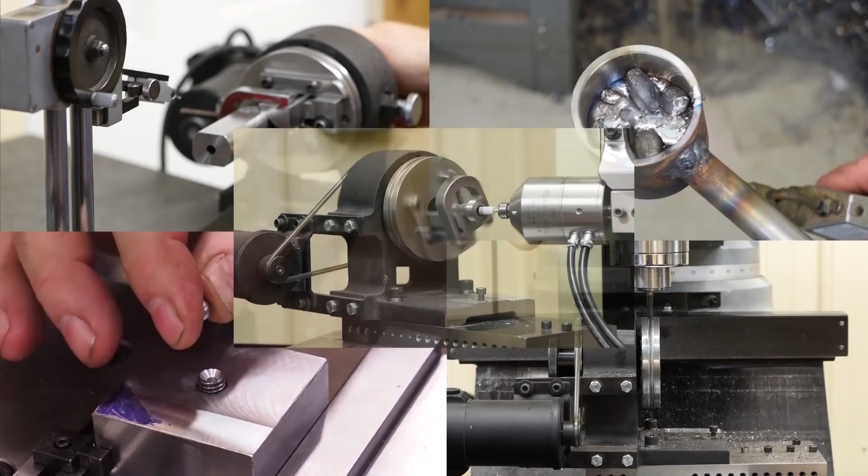About differential screws. My first exposure to this was watching one of Tom Lipton's videos where he went over the mechanics of a differential screw. He'd done an excellent job explaining what they were and how they worked, and I'll put a link in the description box to his video. But this was new to me.

When I wanted to use threads for fine adjustments, I just used a finer thread, like a 32 thread per inch versus a 20 or 16 or an 18, to get some fine adjustments. So when Tom showed how you can play the pitches of screws against each other in what's called a differential screw, I found that quite fascinating, and I thought I'd start playing with them a little to understand them better.

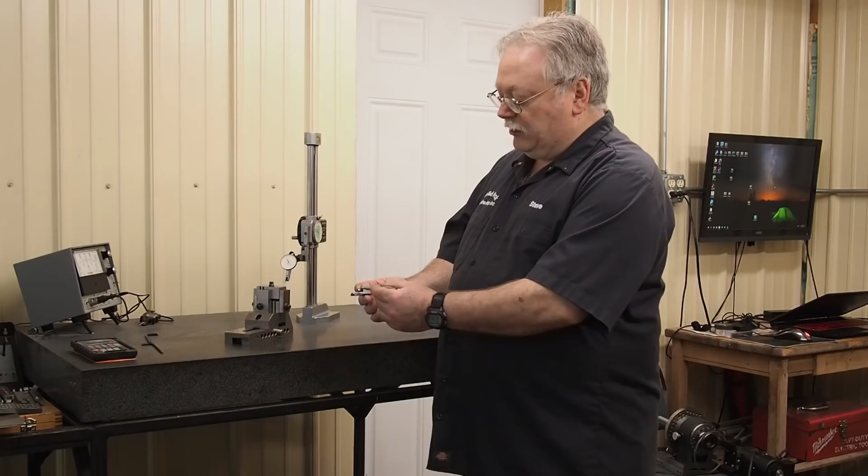In one of our previous videos you saw that I made this little device with a differential screw. You've got a 1/4-28 thread that goes over here, and a 1/4-28 thread in this piece here. This is screwed in, and this coupling device is screwed in and Loctited. Then over here we have a 10-32 thread, which is hooked into this coupler.

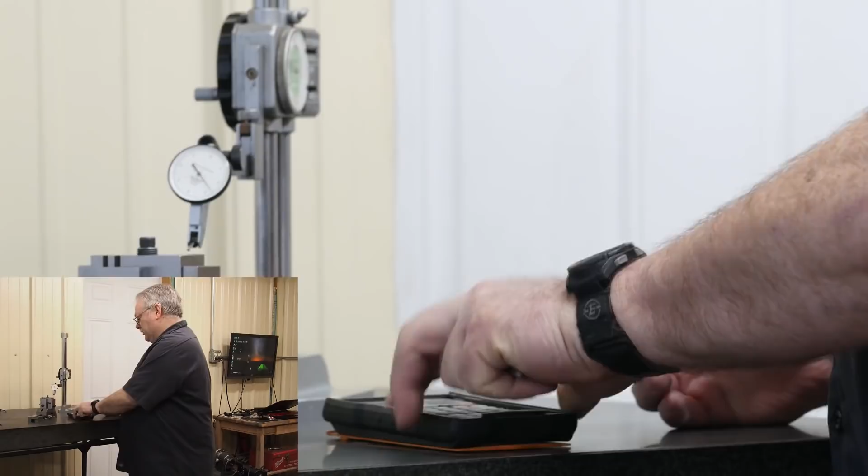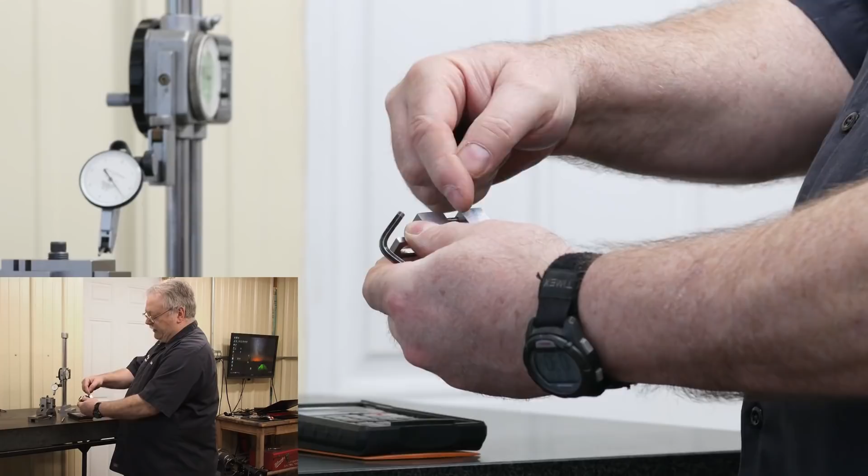I don't remember off the top of my head, but with the 1/4-28 thread, I'll do the math right here. For every full turn of this unit, it's going to want to move this device over here 35 thousandths and 7/10. But because I've got a 10-32 thread here and a 10-32 screw here, the 1/4-28 is pushing it this way, and the 10-32 is pulling it back that way.

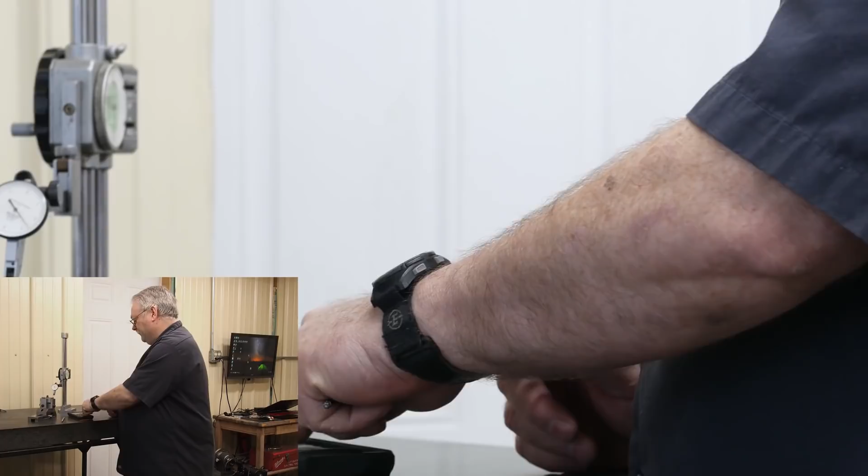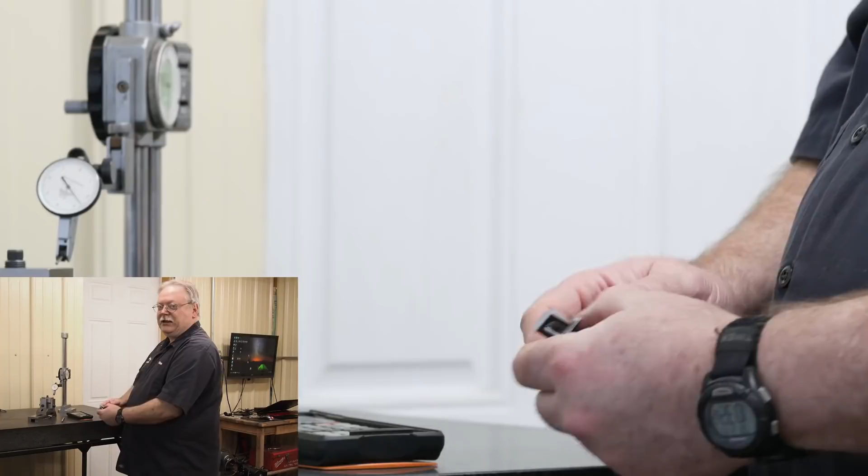What it would do is pull this back 31 thousandths and 2.5, so you'd have a net gain of about, I think, 3.5. Let me check the math. Yeah, so what it works out to is, for every revolution, I'd be moving a certain distance one way and pulling back a certain distance the other way, giving a net gain of 4 thousandths and 4/10. When I hooked up an indicator—I'll put a link to that video here—it actually came out very close to that.

I'll pull this unit apart in a minute so you can see what I built. Basically I have a 1/2-20 thread up here, and down below on this block I have a 1/2-20.16 thread. The way I got that thread down here is I used a CNC lathe and just programmed in the numbers. I don't know how accurate and how many decimal places the CNC lathe would be able to give me for that 20.16, but I thought I'd try it and find out.

So I did the math with the amount of adjustment you'd get out of a 1/2-20 minus, or add in depending on direction, that 1/2-20.16. For every revolution, I was shooting for a 4/10 adjustment. Well, as you can see here, I don't get the 4/10 adjustment—I have about 2.7. There can be a number of factors.

One, the threads are just machined, not ground threads. This pin, the unit with the outside threads—the 20.16 threads and the 1/2-20—I cut those on a piece of steel that was 50-52 Rockwell, so a hard piece of steel. This piece here is soft; I just ran a 1/2-20 tap in here, and I have a little bushing in here that was soft, and I used a different internal thread tool to cut the 20.16.

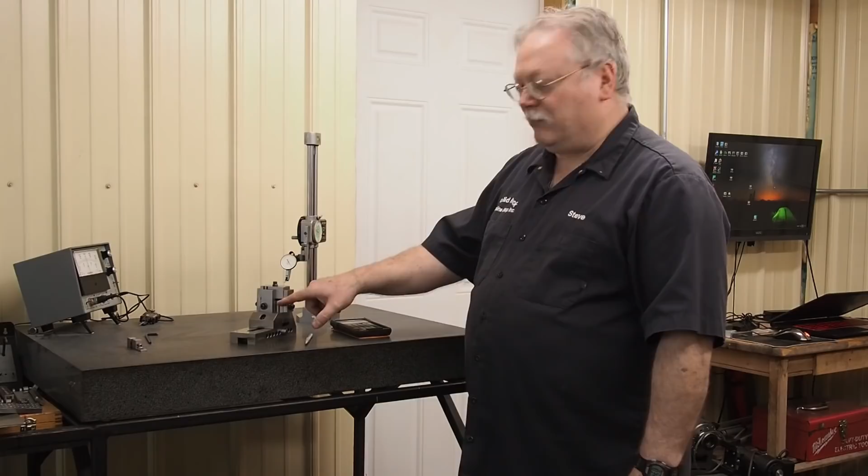There'd be a couple times that I would turn this, and then I might not quite get to 2.7, it might be 2.5 or closer to 3. That could be in the mechanics, since I just made a cheap, dirty fixture. It could be some of the variables in there, or in the threads. There's probably burrs on the edges that look good to the naked eye, but if you look closer you may find some of that.

But anyway, that was a demonstration of a differential screw. I'll show you the reason why I'm looking at a fine adjustment. I think I mentioned in one of the other videos that we want to build a fixture we can put on the surface grinder so that we can grind between centers. I'll show you over here on the computer.

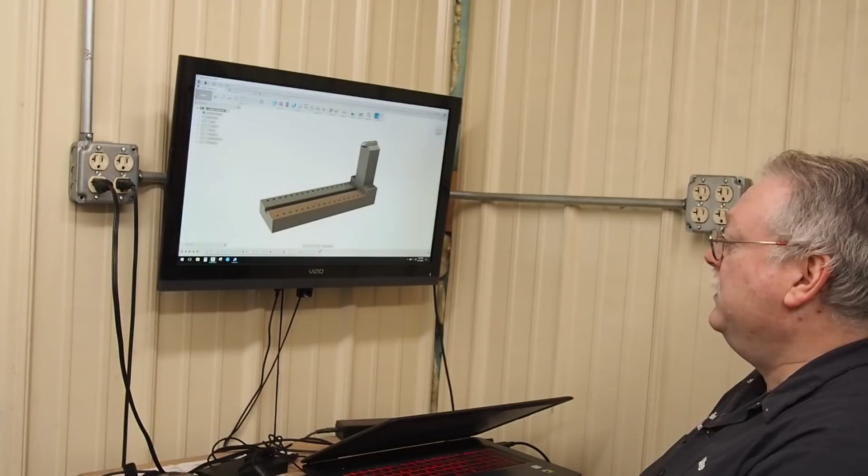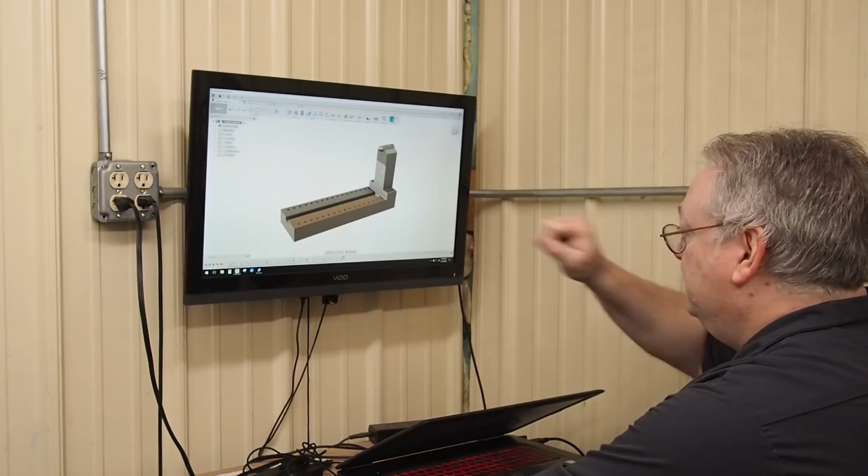Here's part of the design that I got started. This will be the tailstock end, different pieces with a dead center over here. This side will be the motorized end, and then I'll be able to have the adjustment going up and down. But what I wanted to do is have at least a two-part, maybe more, so I can have a fine adjustment, because you need a way to take your taper out, since you're always going to end up with a little bit of taper.

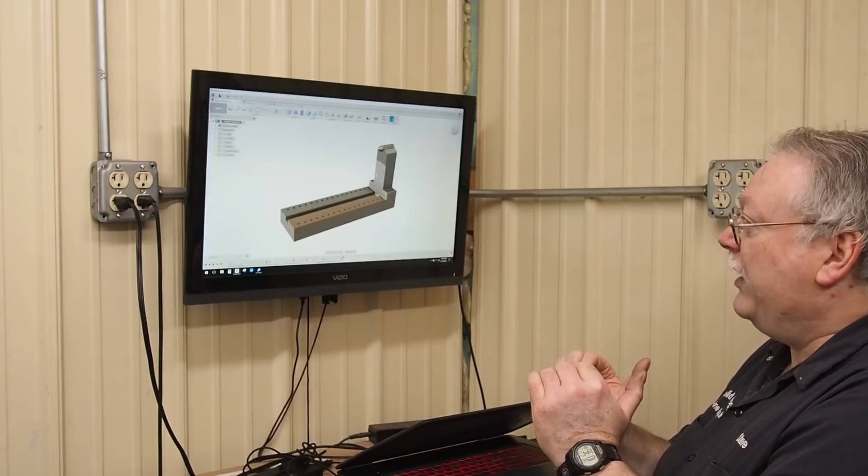When you grind between centers, if you got good centers, you can get some of your best, most accurate grinding. So if I need to take a tenth, say if I got a part that I'm grinding and I have a tenth taper in it, that means I need an adjustment of about 50 millionths or less. I need something with a fine adjustment, because if I got a tenth taper, I need to take half of that from each side. As I raise 50 millionths, that's going to make the tenth difference. So again, I need something with real fine adjustment.

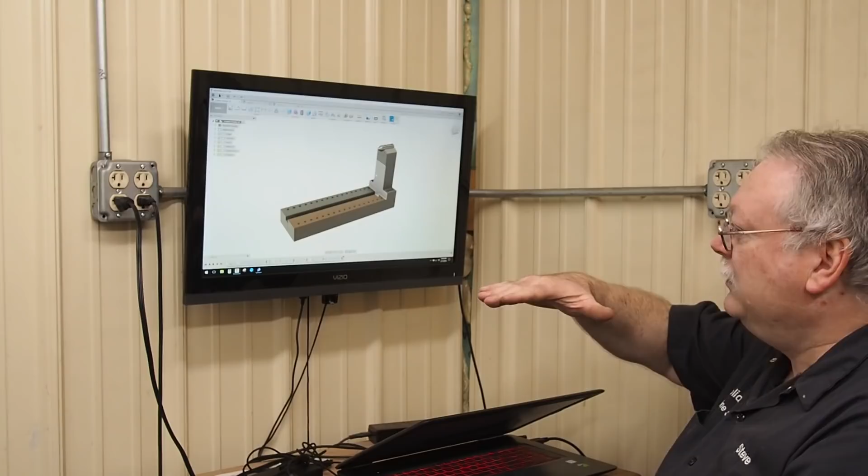Now some of these devices, because they're so fine, they'll just have a flexure point on there, and then they just kind of angle the center. Well, I want my center lines between them to remain true, and just be able to raise up and down. So just some stuff I'm horsing around with, playing with. I've got some different concepts I'm looking at over here.

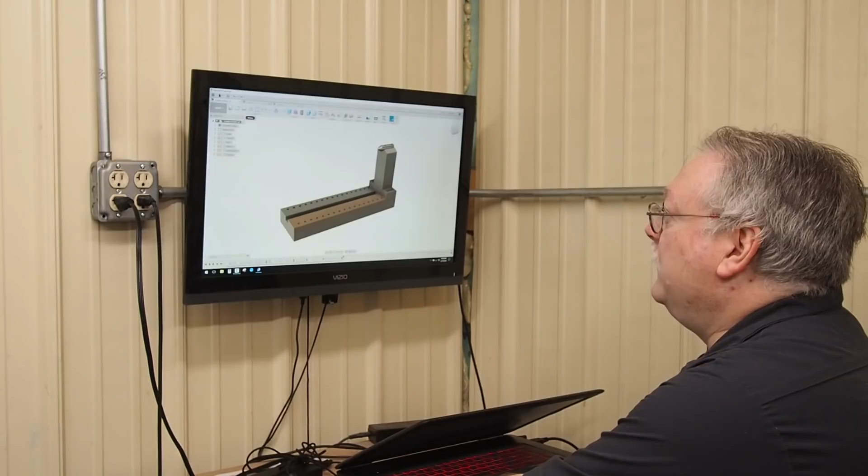One of the things I'm looking at right here, I can have my center mounted over here, but I can make a couple blocks, and this will be kind of a fun little project. I'm only going to have to adjust probably less than 10 thousandths, so getting something that interlocks like that, and machining and grinding that and getting it all matched up is going to be a little bit of a challenge. But I think it'll be a fun little project. Things will interlock, and that's just kind of a rough design and concept that I'm doing now.

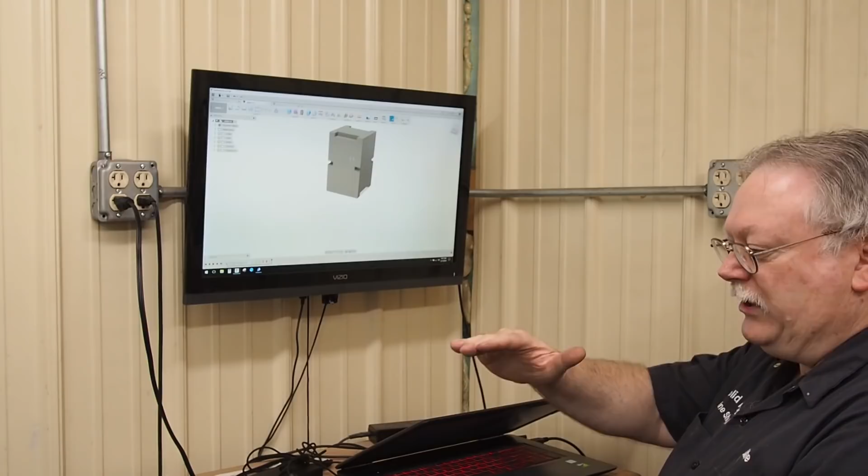Now with the differential screw, that adjusts pretty nice, but the problem is, as you saw in the video at the start, as that screw adjusts, I've got to have quite the length for the screw to adjust, because one thread's pushing, the other's pulling, but yet that screw's moving quite the distance. So I'll be limited to how much I could do, and I was hoping I could just get about 4 thousandths each direction. So another unit that I'm going to play with, and it'll probably be a future video, I think is going to work better, and I'll probably go that way.

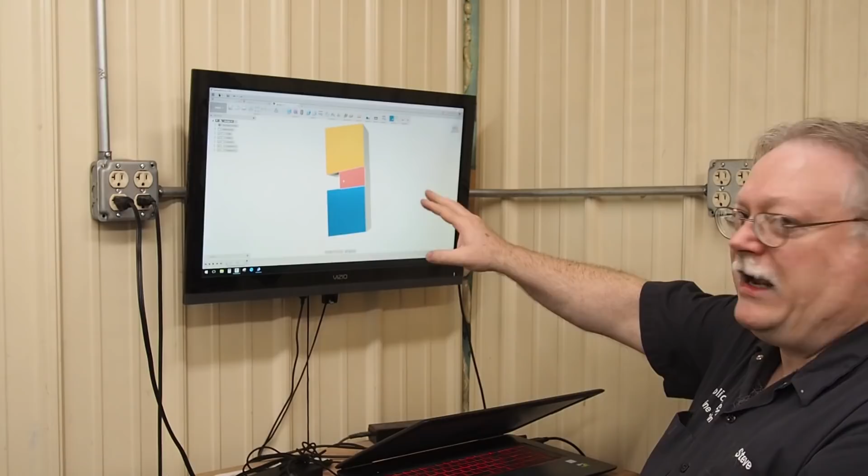I'll have a wedge system. If you do the math, you can take a system like this. I can have a screw sitting on this end pushing at this wedge. I have this one drawn at 4 degrees so you can see it a little bit. Here's your flat surface, and here you've got an angled surface, and an angled surface there. But if I use a quarter-20 thread, every revolution would push this wedge in 50 thousandths. And at about just a little less than half a degree, that would raise this block up about 4 tenths.

The nice thing about this is if I want to add another wedge, say down here, I can have this one add just a hair under a half degree. I can get that extremely fine adjustment. I can have another wedge over here at about 4.5 degrees, and then for every revolution that I go up, I'm going to go up 4 thousandths. So I can have a coarse adjustment with a wedge system down here, a fine adjustment there.

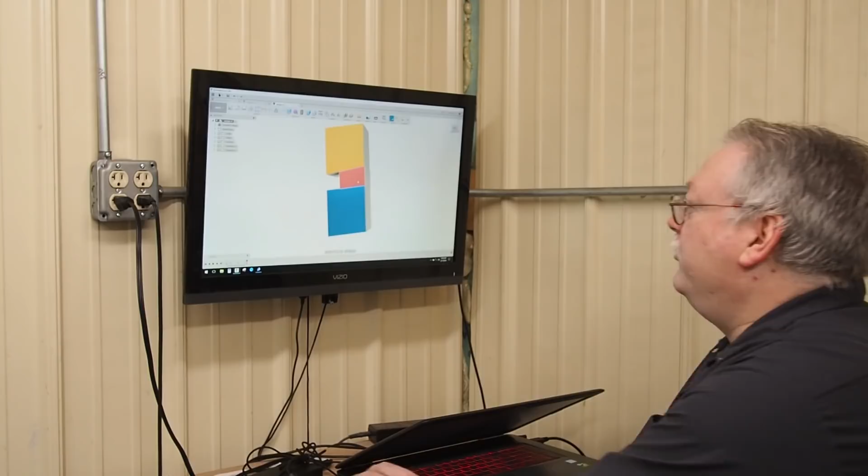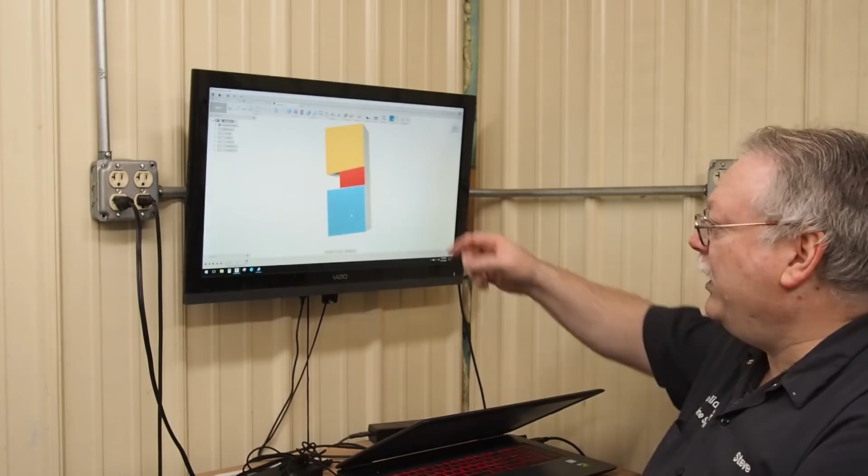The other nice thing about that, if I want to make it even finer, the blocks that I have mounted on the back that will have the threads for the screw, I can start with 1/4-20, and if I wanted to go even finer, I can put 10-32s. If I want to go coarser, I can go 3/8-16s. I can use just some common threads, and each of those will move that block a different amount per revolution, and it will change the type of resolution that you're going to get.

And so I'm going to, in the future, work on a block like this, and hopefully we'll see how it works. We'll compare it with the differential screw, and then I'll make my decision on which way I want to go with it, and hopefully we'll get that tailstock good. And like I say, this whole project of making that center fixture, it may be a 6-month process, I'm guessing. We'll go from there.

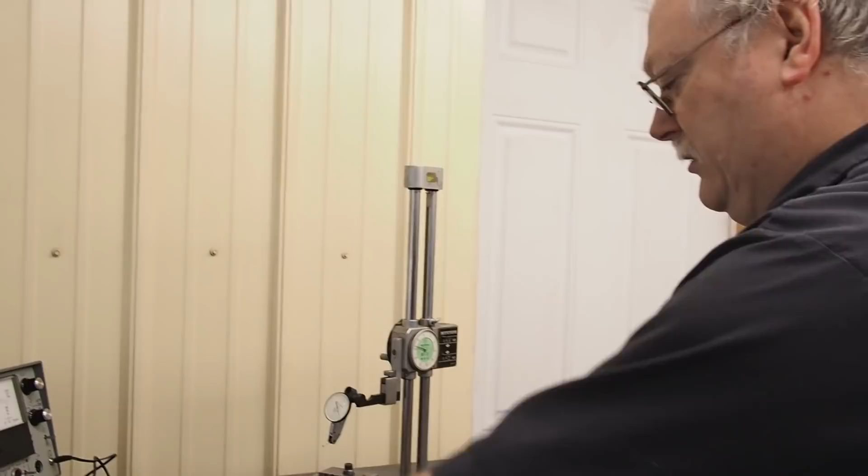There's a few other things that I want to mention, but let's go back and let's pull this thing apart so I can show you kind of the construction that I got going on here. Let's get the wrench in there.

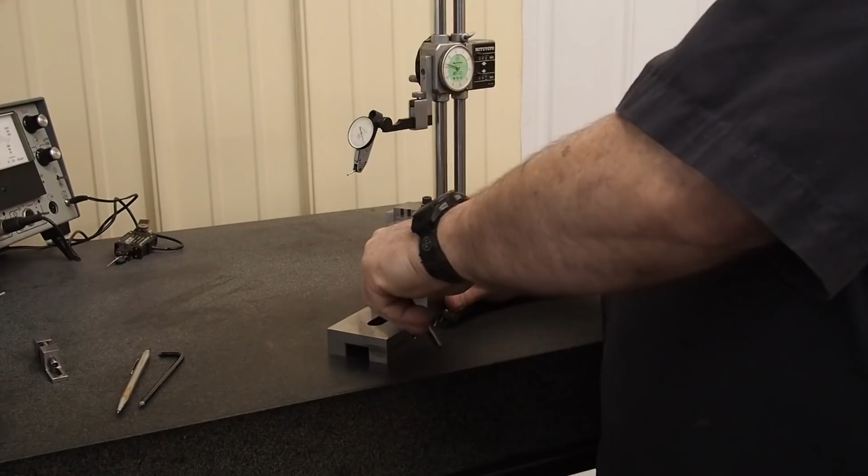Now a lot of these projects, I won't use some expensive tool steel. We got a steel company right here in Holland, Harbor Steel, and from time to time I'll go in there and buy cold roll because it's quite a bit cheaper than tool steel, and then I can do all this testing, these projects. And so even with these pieces, it's all cold roll on there. I'll throw these on the shelf. I'll use them for future projects like this that I'm testing.

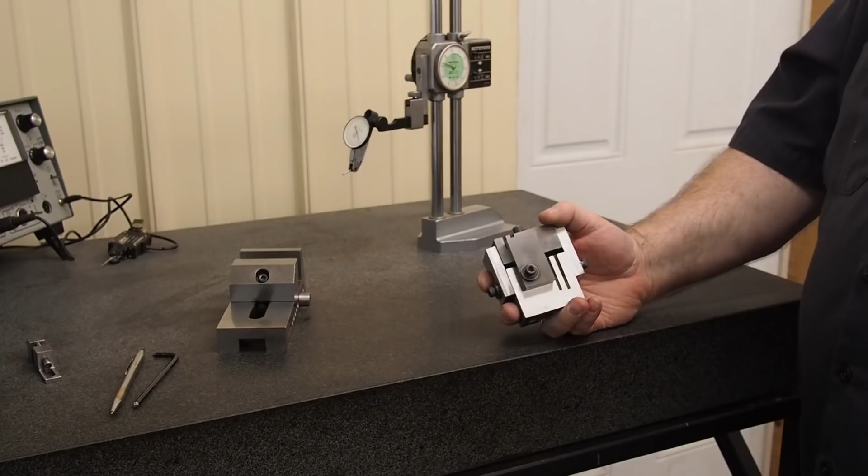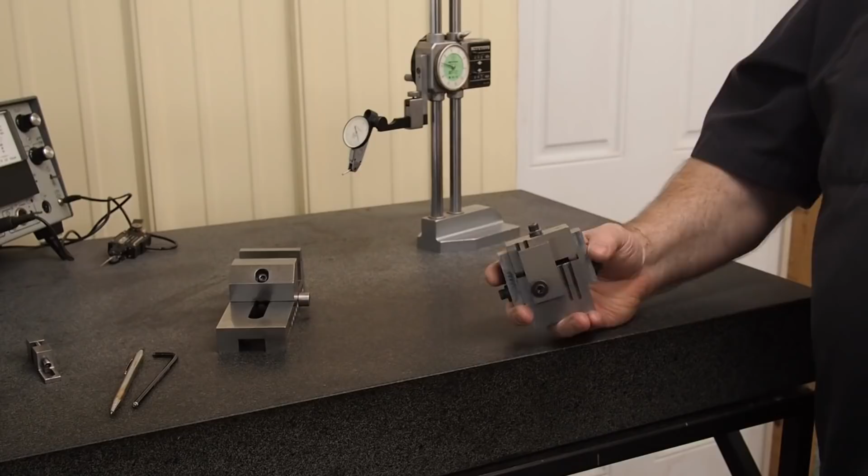So I just recently ran down to Harbor Steel and purchased about $100 worth of cold roll steel. I'll do that probably about once a year because it's just nice to have some of that on the shelf. And the nice thing about Harbor Steel, and I don't know if steel companies in your area would do this, but if you have them cut steel out of a bar, you're going to be charged a cut charge.

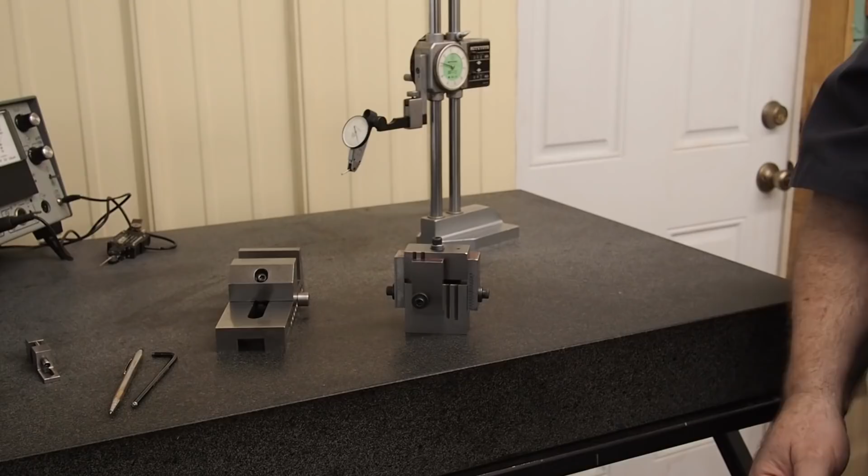And so at Harbor Steel, they got random lengths, and what's nice, you can go in there and just see some of the random lengths. These were bars that are shorter. They're leftovers from other customers making cuts, and they may vary from just little 6-inch pieces to 36, maybe even longer. You can get a lot of different lengths, and in fact, let me show you what I just picked up over here. I'll carry it over there.

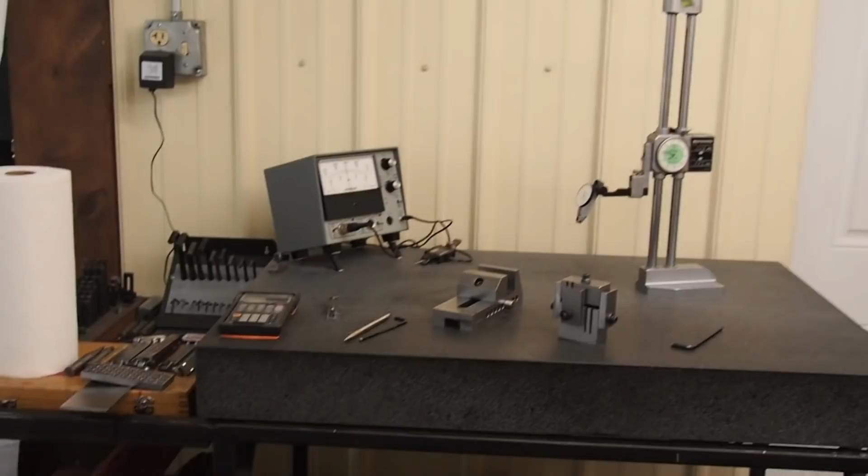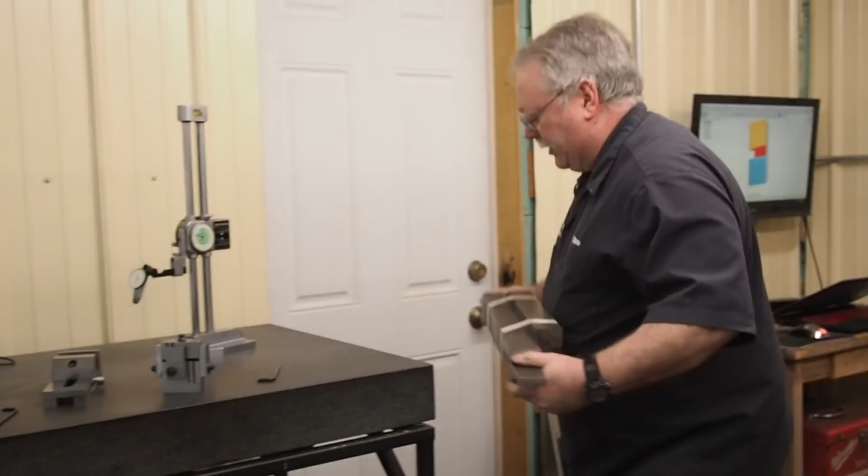Here's the pile of steel I just got from them, and these were all random lengths. And so I don't have to pay for the saw cut, and so that works out real nice. You can save a lot of money that way.

When I posted on Instagram, some of the people that follow me mentioned that they got scrap yards in the area, and we have a few too around here, and that would be another good source where you can probably get some of these chunks of steel pretty cheap, so you don't end up investing a lot of money in a project. You can take some cheaper steel, test it out.

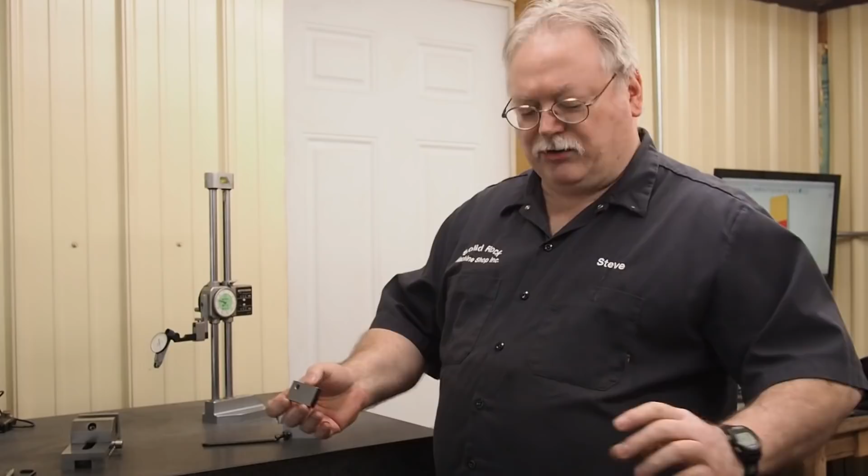One of the things with cold roll steel that you got to watch for, though, is there's a lot of stress built up in the steel. And that's true with hot roll too. And so when you cut this, sometimes if there's a lot of stress, you can see it moving. So there's a couple things you want to keep in mind when you're cutting this steel. Just give you a couple pointers. When you're cutting this steel, the longer pieces, you'll see that stress more and more.

But when you cut this, let's just say that you got 100 thousandths total that you want to take off on this thickness. Well, what you want to do, you want to make sure you cut both sides, and you want to cut equal amounts. And so you want to rough it and then finish it. So if I have 100 thousandths I want to take off, I want to take 40 off this side, flip it over, take 40 off this side, and it will stress back and forth.

A lot of that stress, if it's in there, it will release. And then you come back and you finish it, taking 10 thousandths. And that way you can work a lot of that stress out as you're cutting it. And you do similar operations when you grind it. Now sometimes there's so much stress in there, you just have to throw the piece away. I've ground pieces already, and you can actually see the stuff moving on you as you grind it.

You can send it out and have it stress relieved or normalized or whatever, but a lot of times at that point it's kind of too late. So when you're machining a piece like this, it's always good if you take a cutter that will cut the full width of this as you're coming across. If you take just a regular end mill and you're cutting half of that, well, stress is relieving out of that, but not this side. So you're getting some twist and stuff.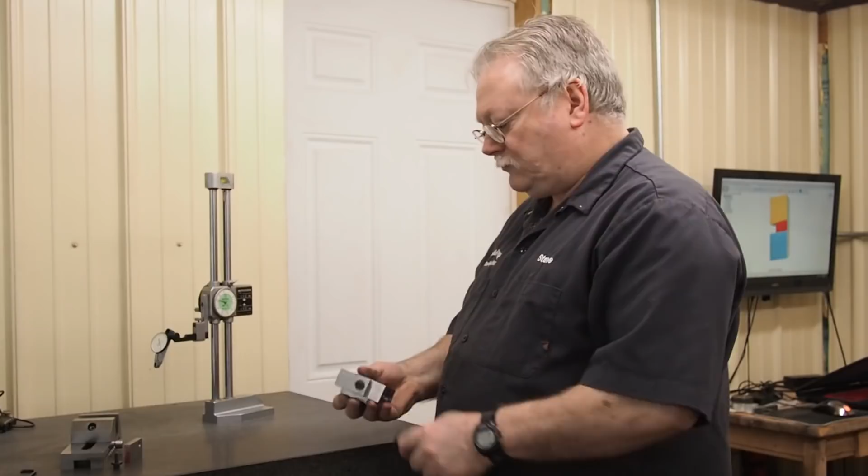By having a cutter that's big enough that covers the entire surface, it works a lot nicer, and again, you can work around the stress there. But that's just some pointers on working with cold roll steel, hot roll steel. But I just made this unit right here to show you what I got going. I'll pull it apart.

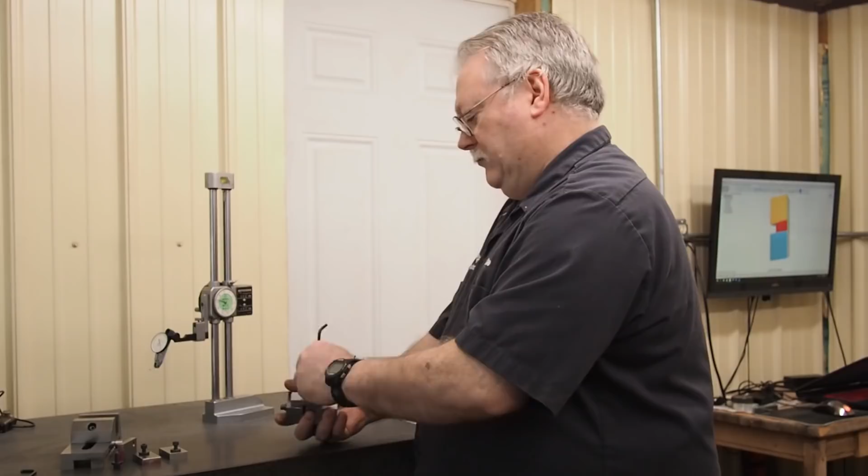So I had the 4 blocks that I can mount to this one right here. That would help guide this because I only have a 1/4-20 thread. I got 2 10-32 screws with springs. I'll show you in a minute down here. But I wanted this block, this movable block, I wanted it to guide real nice. And one of the things that I knew as this was going up and down, I got springs down here. I got probably a light contact on here.

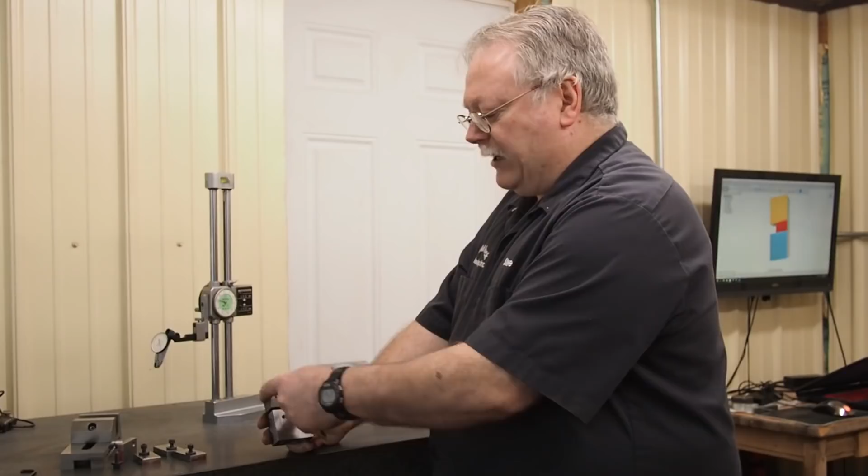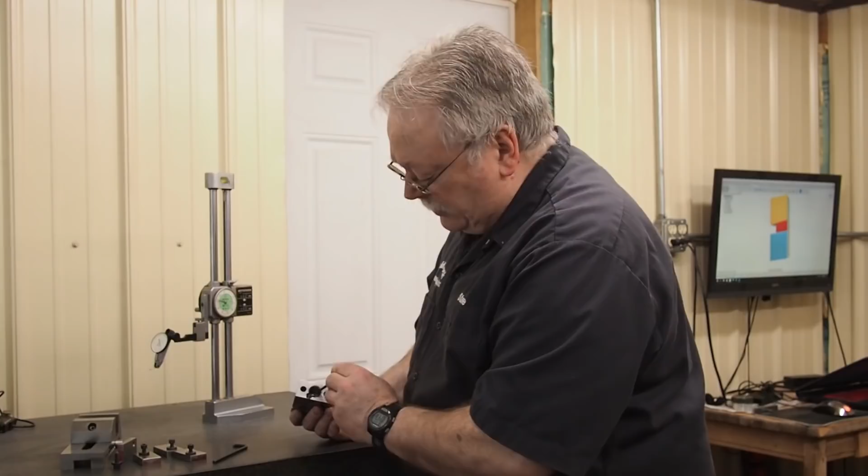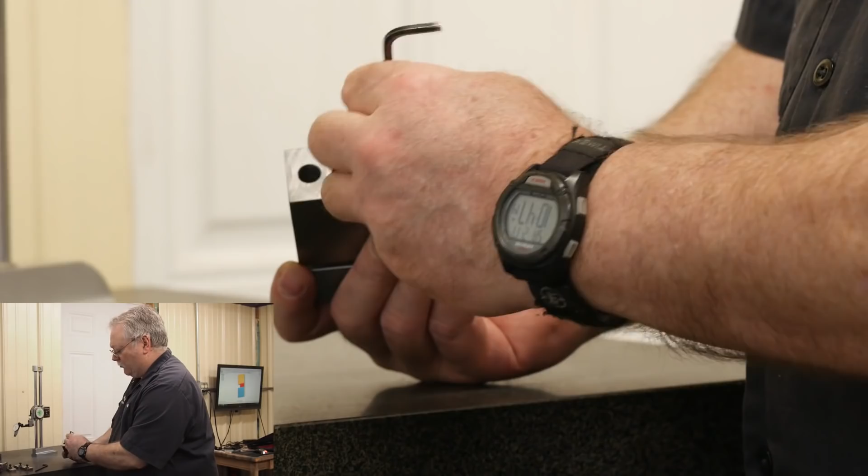I knew I might get some drag issues with that fine adjustment, with that 4 tenths too. So what I did is I ground this block about a tenth smaller than that to try to eliminate that. And so if you look in the bottom, I don't know if you can see inside there, but I have a bushing inside here that's screwed in. And over here I got 2 spring-loaded holes because I wanted to have the spring pressure to pull the part and always keep the tension on the same side of the screws.

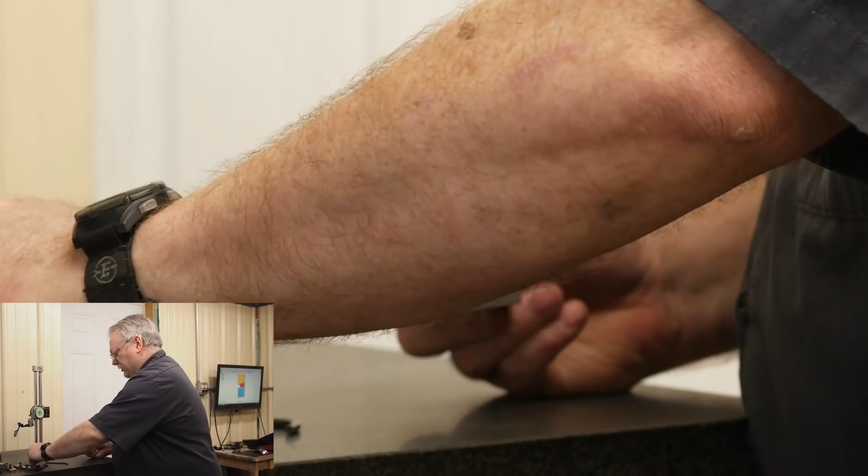Because with the threads, you know, there's going to be some slop in there, and I wanted to make sure that that wasn't messing up my adjustment. So I put just a couple die springs in there, with the screws, and then that would always keep tension, so that when I make my adjustments, I'm always staying on one side of my threaded screws.

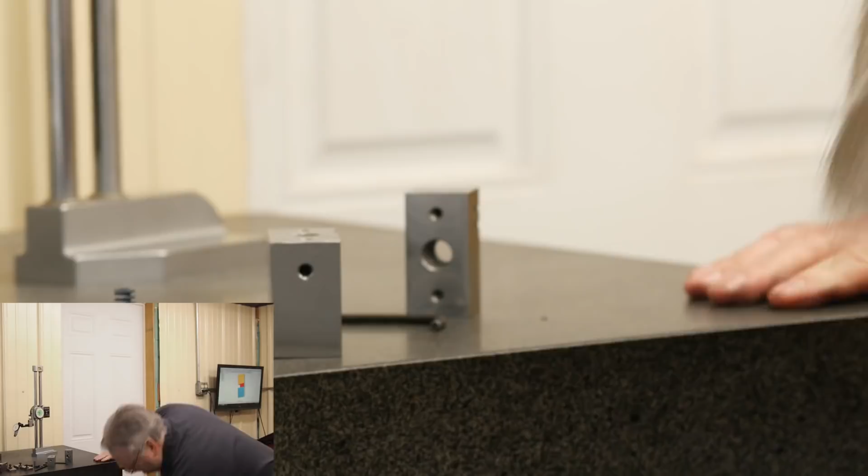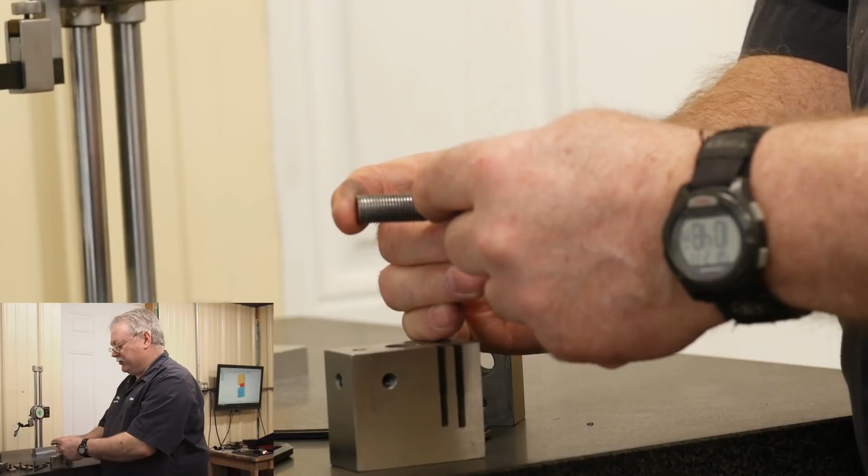And with these fine threads, they take a while to come out. But basically, this is the differential screw. This side right here has a 1/2-20 thread. This side right here was machined on the CNC lathe, and it's a 1/2-20.16 thread. Now I was getting on average, testing this, about 3.97 tenths per revolution. And I did the math on that, and that would be a 20.16 thread.

And so that would be basically, if I was shooting for that and I'd get an exact reading, that's what it would be. So again, I don't know if there's limitations on that CNC lathe that we have as far as when I plug in the threads per inch, when I plug in 20.16, if it could even get that fine of a resolution. If it rounded off to 20.1, I don't know.

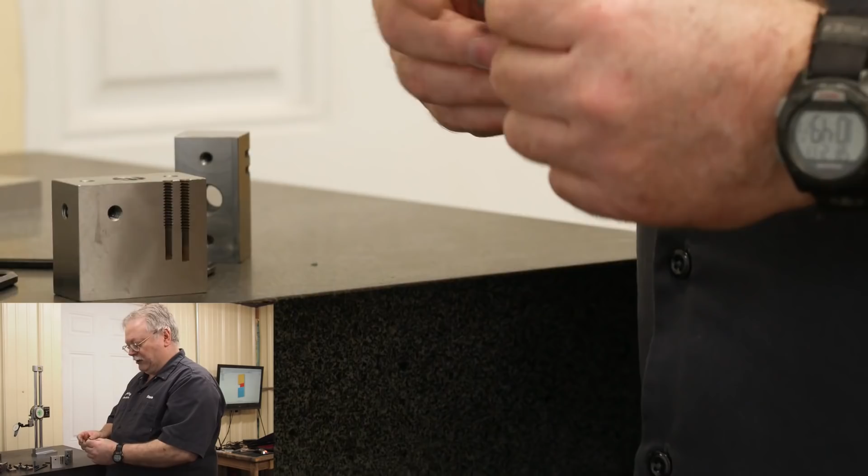I used a different threading tool for the OD than the ID. There could be mismatches there. There could be a lot of variables that are at play there. But anyhow, that's the concept behind the differential screws, using different threads on both sides to achieve some of that fine adjustment.

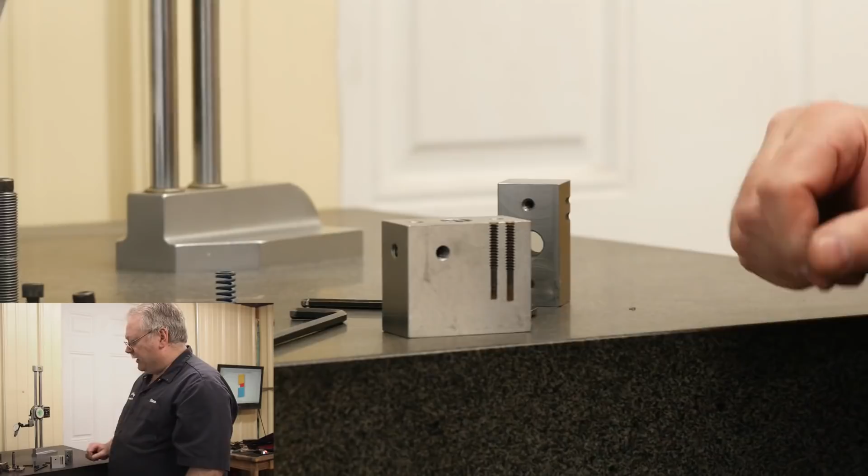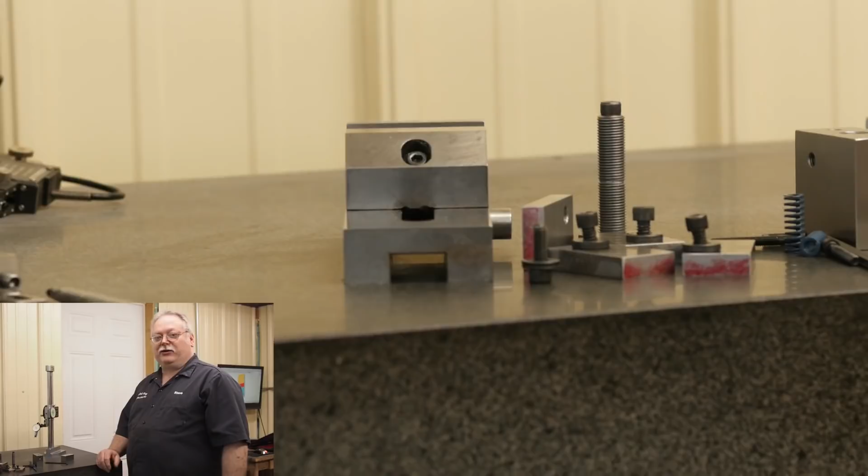And I just want to talk a little bit about some upcoming things that will take place. We've been invited to Bar Z Summer Bash, and we've never been to one of these type events before, so we want to give a big thank you to Stan for inviting us, and we're planning on going. It's an event that'll be towards the end of June, so that'll be a new experience for us. We're hoping to meet some of our subscribers, viewers, and some of the YouTube creators out there, that'll be kind of nice.

We communicate over the YouTube forum like that. I've had phone conversations with a few of you guys, and it's kind of exciting with this format of YouTube, being able to meet other people in the trade and being able to learn. And so anyways, a big thank you to Stan, and I hope that we can see a lot of you guys there. And I want to show you something else with the YouTube community, how good this is. A couple things in the recent past came up that I thought were really neat, and I want to share with you. So we're just going to go back over by the computer here.

Well, there's a few things I wanted to talk about over here. One, when I go and watch other videos, a lot of times I like to read the comment sections, and I'm finding myself spending more and more time on YouTube videos, less and less time on TV and other entertainments, gaming. But anyways, it was kind of a pleasant surprise when I was watching one of the last videos Stan did on grinding wheels and mounting and balancing. After I watched the video, I started looking at all the comments he was getting, and as I was scrolling down, here's an individual, Rupert Powell.

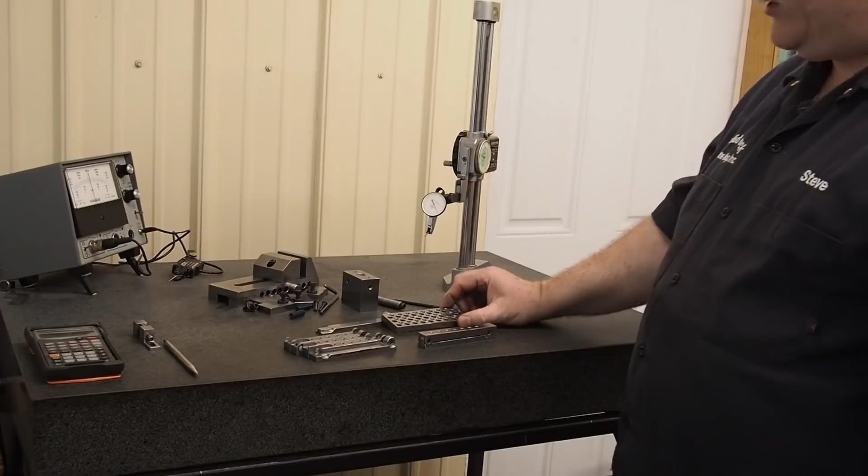And one of the things that I want to show you too, when we go to the summer bash, one of the things that we're waiting for right now, this is all CPM 1V, all these projects. This is what we get ready to go. Some more setup blocks that I'll use with my cube. But I'm making 4 more of these low profile sine bars. My original plan was make one for myself, make one for my son Adam, and then we have Gary Walters, he's helped us move equipment in here, and Bruce DeBoer, he's helped us with pouring the cement. So we were gonna make one for each of those guys as a thank you.